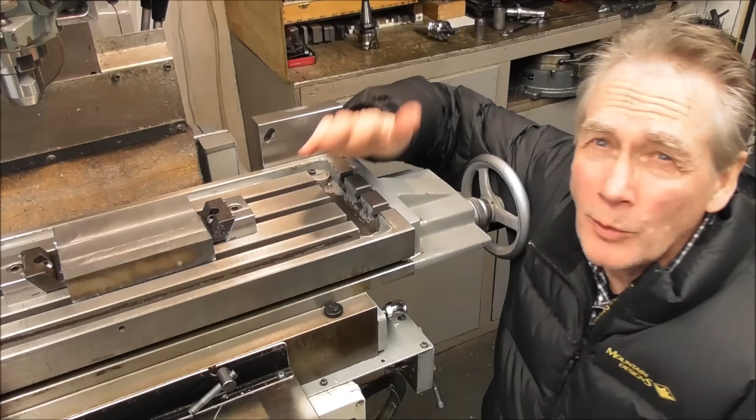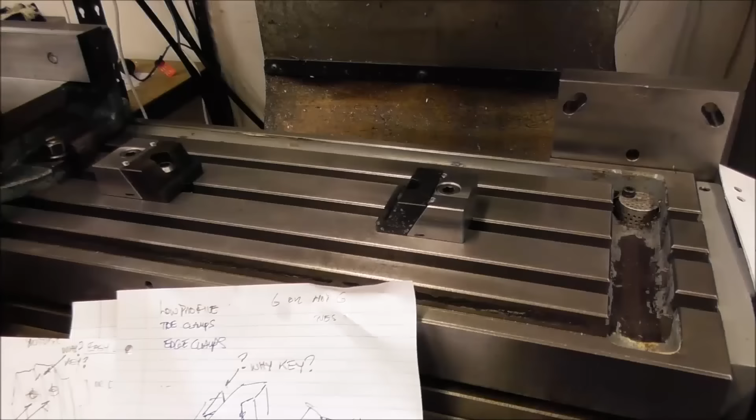In this video I'm going to design and make low profile edge clamps, or a two-part vise, able to be used for both applications. I'll go into the design and then machining it up. Please follow me on this journey as I discuss different ways of designing and developing a product, and as I make it I'll throw in as many machining tips and tricks as I can.

The first thing to do before you do any of your own design is to study existing designs. Look online, look at all the products available, study all the manufactured and developed products, look at all the YouTube videos of low profile and two-part vise builds. Follow them through. The more time you spend looking at other designs and critically analyzing them, the better.

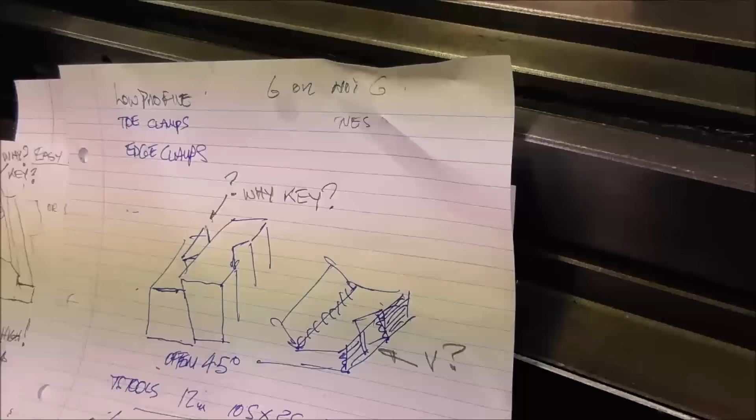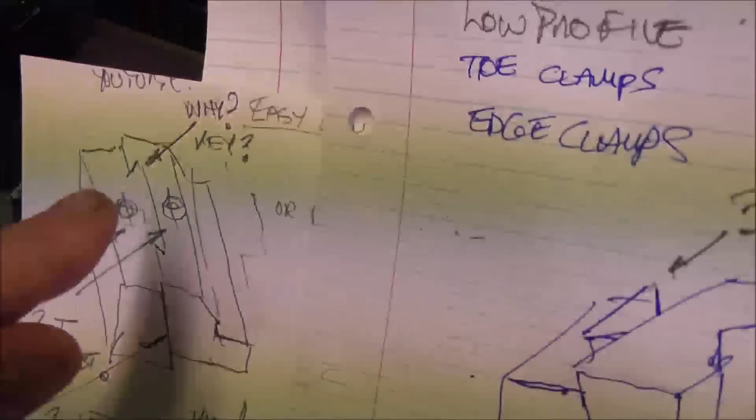Gradually immerse yourself in the design and think about it over several days as your brain slowly aligns itself with the design process, and make sketches and ask questions. Why have this dovetail here? Isn't that going to have clearance and cause problems? Why have two cap screws? Is that better than one cap screw? Does it hold better on the table with two?

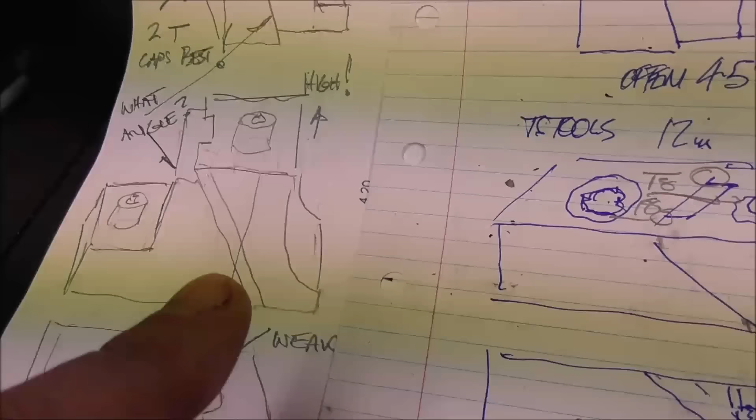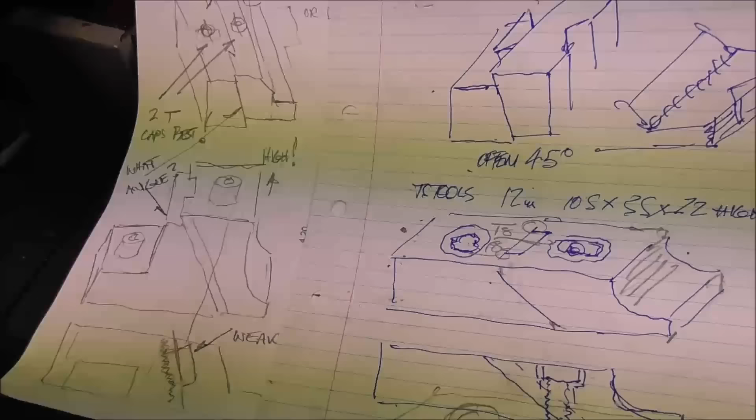Why is this one so high? What angle should they be? A shallow angle gives more force this way, a steep angle gives a different result. Look at all the different features. This style has a grub screw, but how much force can that grub screw apply, and how long will it last? Make little notes and criticisms before you even begin.

Then start sketching how you think a design would work that takes all the good aspects of the current designs together in your design. You build it within the knowledge and design constraints that you understand, with the end goal in mind. You start sketching it, rubbing out bits and redoing bits until you have a really good possible design. Now at this point, it's sketched.

Designed and prototyped in your head, you've thought about it, you've laid awake at night thinking about it, and you think this isn't going to work because that's going to rock over on an angle, or that's going to come loose, and this, that and the other thing. Slowly you erase that design and come at it from another angle. After a couple of days you're ready to start getting serious with the details of your design.

This is where the design process branches into two different roads. Either you have high-end CAD skills and can solid model it into a CAD assembly and analyze it in its abstract sense on your computer - that's a really good way to do it. Or you're more traditional, you don't have those high-end CAD skills, and you're better off to get a chunk of steel and start making it. That has advantages too, because it allows you to test the prototype in various stages during its manufacture.

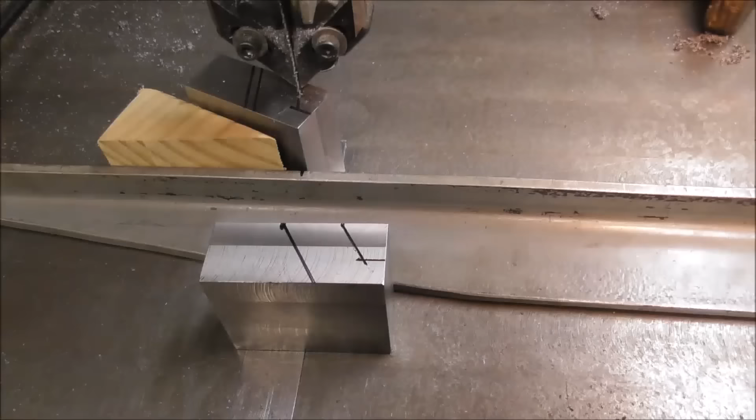So just two little blocks, and then felt pen mark the angles at 60 degrees and just bandsaw them.

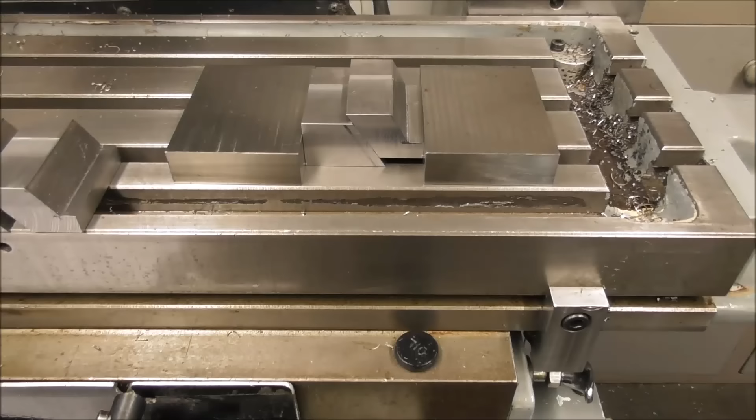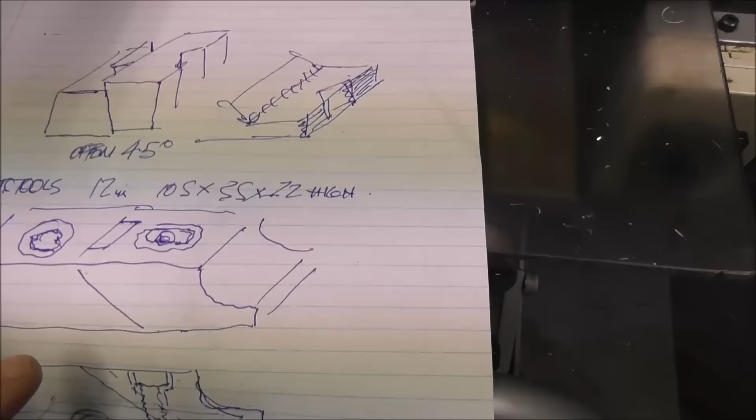So I've just bandsawed those blocks out, and I'm looking at the design of the next stage. A lot of existing designs have dovetail guides in this portion, or square guides, and I can't really see a good reason for having them other than they kind of look cool and hold the parts together when they're off the mill. But when they're on the mill, there's no real need for those guides.

It just adds a lot of work and introduces probably as many errors as benefits. It makes it difficult to grind after they've been hardened. I don't know, I might be wrong, but I just can't at the moment see why you'd need to do that. I need to mull that over for a while.

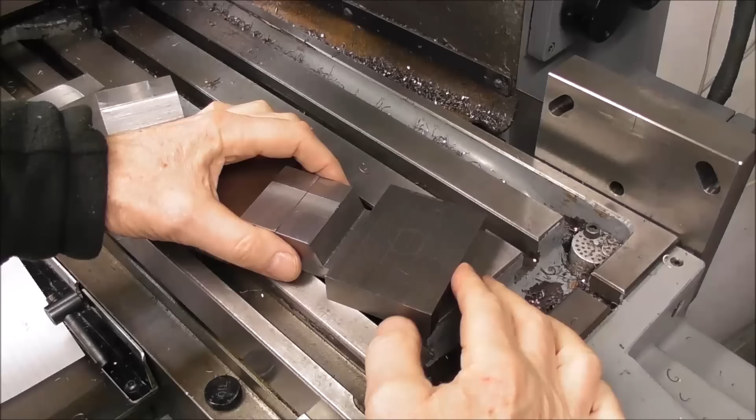Thinking about this guided or not guided design, if anything it's an advantage to have it not guided. This is it in its clamp position, but if you had an error in the parallelness of the setup, it automatically accommodates that error by the locking block floating up on an angle. If it's constrained by a slideway and there's an error, you're only really getting point contact in the corner. It's not able to adjust its position.

Here I'm going to machine the 45 degree bevels on the back of the blocks. Have you seen this type of inclinable tilting vise before? I made this just out of a basic little square-sided vise, and these side pivot plates are just screwed onto a base plate.

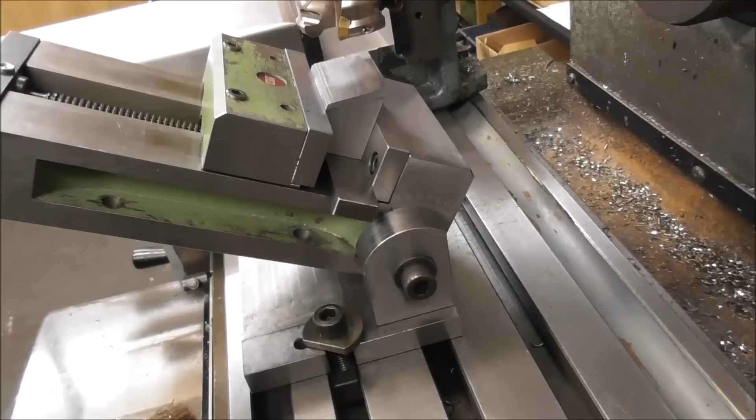They don't need to be doweled or high precision because it's clamping up against the side of a square vise. It doesn't actually need doweling, it just perfectly aligns itself. There's a video on making this very simple little base plate called Incline Your Vise, I think. Go back a few years and you should find it there.

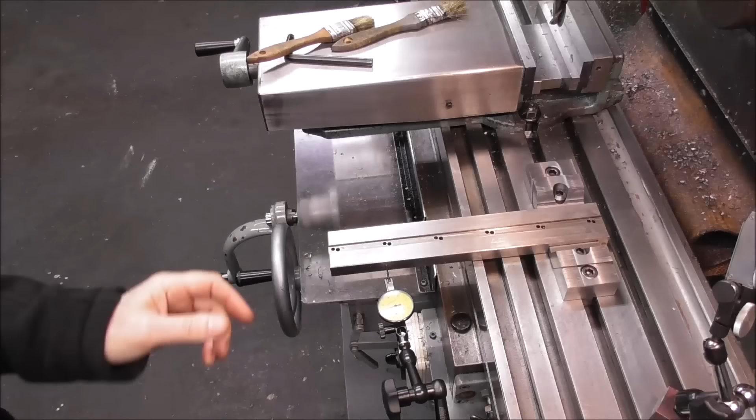Alright, well, time to do some testing. So I've tightened up the moving jaws, and as I discussed earlier, they've snugged and floated down to a nice parallel grip. I've checked it with shim underneath, and it's pulled down tight on the table, so the angle is pulling it down really tight.

Now let's see, I'll put a dial indicator over here. Let's see how well it's holding. It's pretty well. I've got a long extension, so I've got a lot of leverage, but I'm getting a little bit of movement. So where's that movement coming from?

I'm putting a dial indicator over here. Let's see whether or not those moving jaws are displacing under that movement impact, because what we're doing here is simulating a big cut, a big face mill cut, for example. If it grabbed the work and tried to wrench it and move it, where's the weakness? Where's the first line of failure?

So let's try tapping it here, and let's look up here and see if that's going to move. Oh yeah, see that? Okay, that tells us a lot.

So what's happening is, what I thought was an advantage of the moving jaw being able to skew around on that face to accommodate a nice parallel, even grip, is now a disadvantage, because the whole thing is skidding. So the moving jaws are skidding on that flat face. I hadn't thought of that. When I did the first trials, I saw it just as an advantage not to have that guided, but now I see it's a disadvantage. It's causing the jaws to skid on that surface.